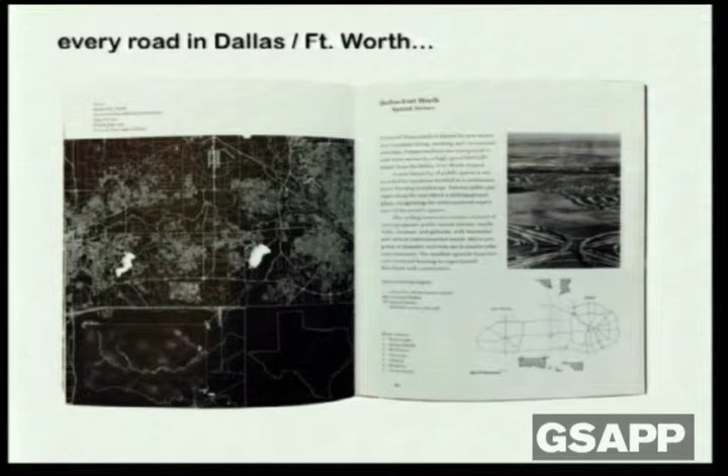So that was the time of Tschumi, just before I started. I worked as the lowest intern at Steven Holl's office, like really the lowest. I was responsible for inking almost every drawing in this book, Edge of a City, six days a week, not designing every drawing, just inking every drawing. And you don't ink anymore, but it was a fine art. Six days a week, all day, every day, I drew every road in Dallas-Fort Worth, and in Phoenix, and in Cleveland, and New York also.

And what's interesting about inking drawings is that it's copying. It's lots and lots of copying. It's kind of Zen, but it's sort of deep copying, and maybe internalizing. I'm hoping that I was also internalizing what I was drawing, because looking back, I realized that during my hours and hours of drawing, I'd become very interested in exactly what the book was about: architecture and the city.

The projects in Edge of a City leverage the organization of the city, program, and form to create new architectural form and new ways to live in those forms. Looking back, I realized that Steven was really interested in combating sprawl with these new forms.

And I'm currently working on my own book with my colleagues at UrbanLab, in which we also speculate on what is possible for architecture in the city. We do it with ideas of hybridizing and leveraging and thickening. And we're producing a set of projects that we hope question the assumptions and expand what's possible for the city.

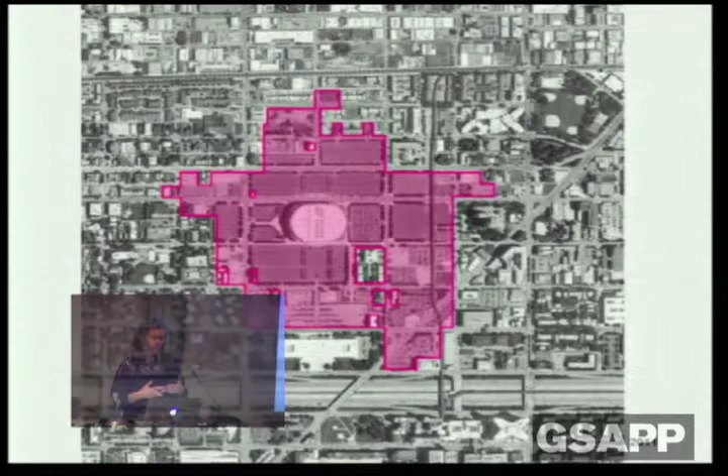So we asked ourselves, what could we do to stop the expansion of void while leaving the parking? And how could we also leverage that for new public amenity or public space within the city?

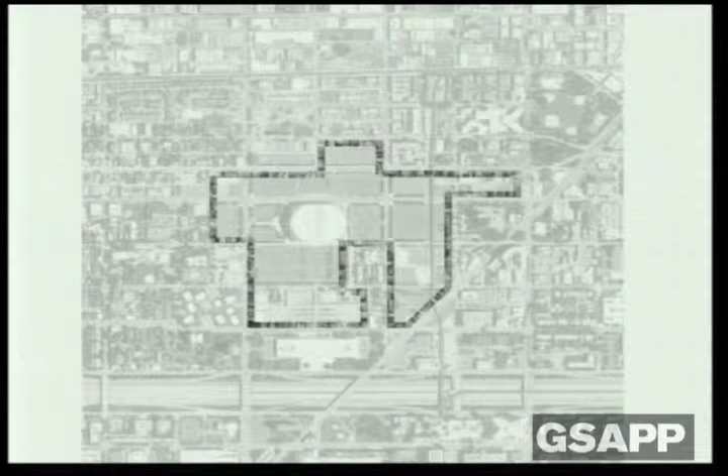So we came up with this idea of a reverse growth boundary, a kind of growth boundary for parking, but a new edge for the city to fill in too. We encircle the official parking, hoping that by doing this, the neighborhood will fill back in.

In order to inhabit the boundary, we looked at a typical Chicago typology, the 3-flat. We played with it, stacked it, carved it, and invented a catalog of new 3-flats that we could deploy along our growth boundary for different effects, programs, and densities around the zone.

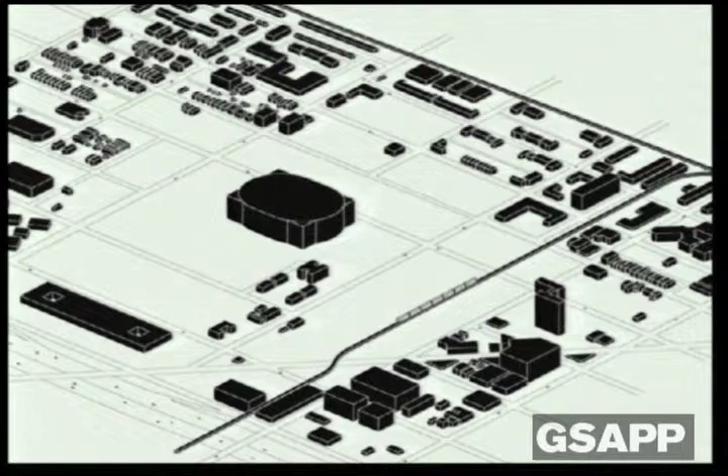So here's the existing condition with the site and a lot of void. There's the parking with our growth boundary delineating it, extruded, and then the 3-flats deployed.

The project's not really a wall now, but a series of gateways that allow passage through while still giving identity to the United Center precinct and still allowing for porosity. It's more of a sponge.

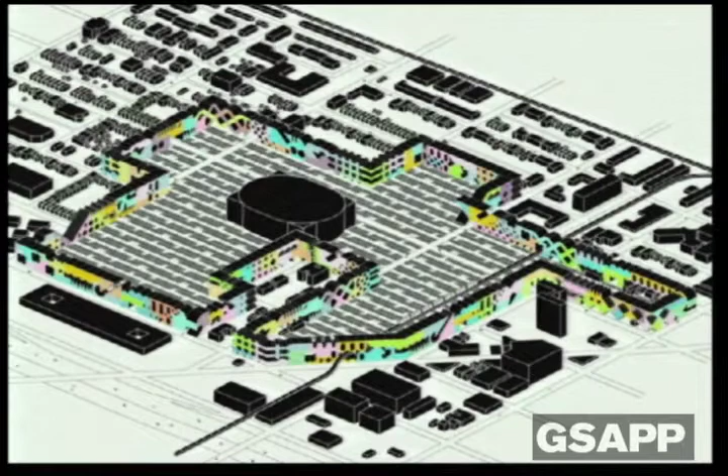The difference between this slide and this slide is the neighborhood we're imagining would fill in and densify organically. We wouldn't design that part.

Since the United Center is a winter sports stadium, and we've created this precinct, a very specific area, we thought, what can you do in the summer?

This growth boundary could actually be animated by temporary programs within the zone. For example, in the summer, it could be the city's largest temporary farm, or its largest campground, or its largest temporary pool.

So that's sort of how we very quickly approach our projects when we're speculating and asking 'what if,' and then playing out the scenario to its end to answer the 'then.'

So another question we asked ourselves—this is the project that Amal mentioned in the introduction, Growing Water. What if a city's streets were leveraged to create a new street park network? And then what if that network hosted a series of new building hybrids?

Growing Water starts with the grid of the city and the fact that Chicago sits on the shores of Lake Michigan, which holds 20% of the Earth's surface fresh water, and 95% of the United States' surface fresh water.

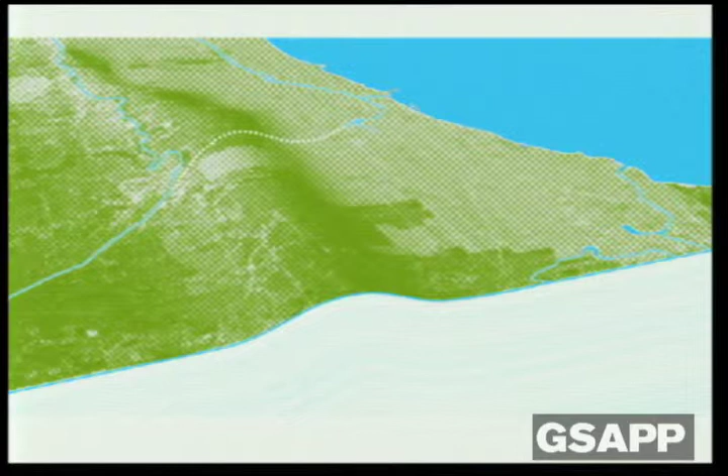But 100 years ago, Chicago decided to cut the watershed boundary, connect the two watersheds, and reverse the Chicago River.

The city did this because it was dumping its wastewater into the rivers, which were flowing into the lake, which is where it was getting its fresh water. So it seemed like a really good idea at the time to reverse the rivers and send Chicago's sewage to St. Louis.

So then St. Louis started to sue Chicago and hasn't stopped since.

This is the current water situation in Chicago on the left. It's an open loop, and those of you interested in ecological issues know that loops aren't supposed to be open usually—they're meant to be closed. So we thought about how we would actually close the water loop in Chicago, but leverage the infrastructure to do that for new public space.

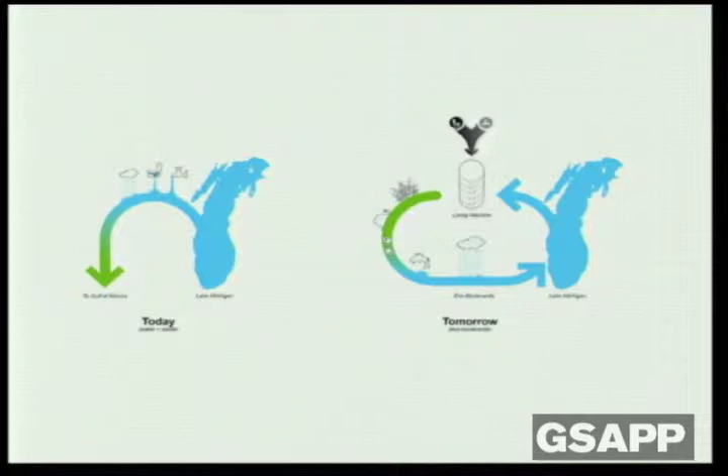We propose to redesign every street, every half mile from each other, to collect stormwater and wastewater and use gravity to allow that water to be percolated or drawn back to the lake.

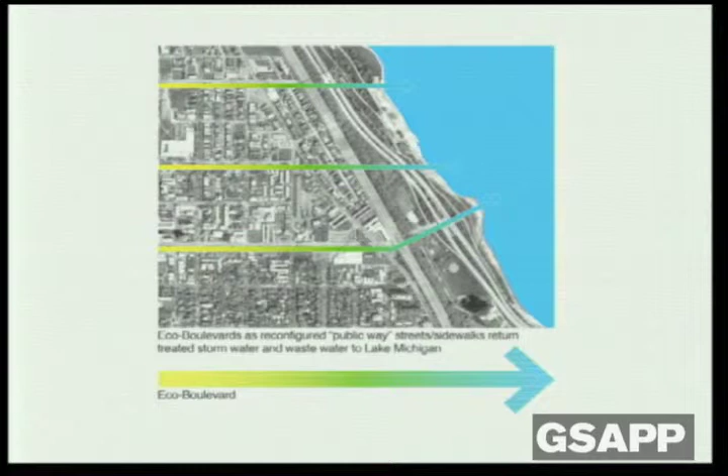The eco-boulevards, as we call them, would run through the city according to the network of the city, making connections with parks—there's a kind of emerald park system and a lakefront system—so it would basically turn a couple of existing networks and standalone parks into a huge park network, and every inhabitant would therefore only be a quarter mile from a park.

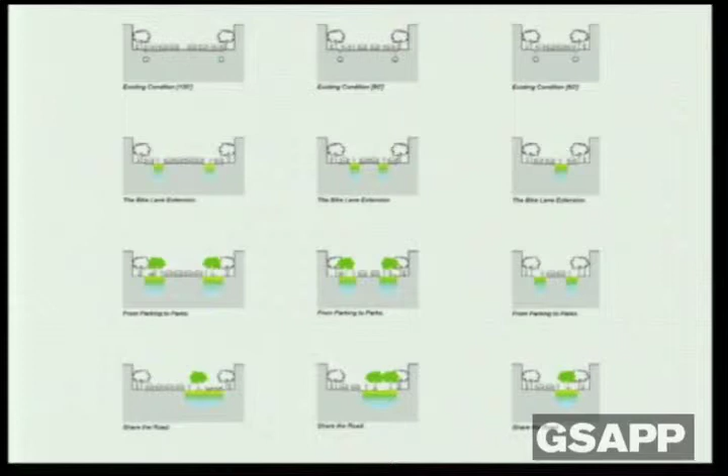The streets that were turned into eco-boulevards would be hybridized to accommodate ecological and cultural programs. These represent patches of ecological and cultural programs—the ecological programs collect stormwater, basically they're wetlands. The cultural programs are things like markets, playgrounds, and recreational fields. This would be a really souped up street where all the parking is gone and very little street is left, but this is only the most extreme example.

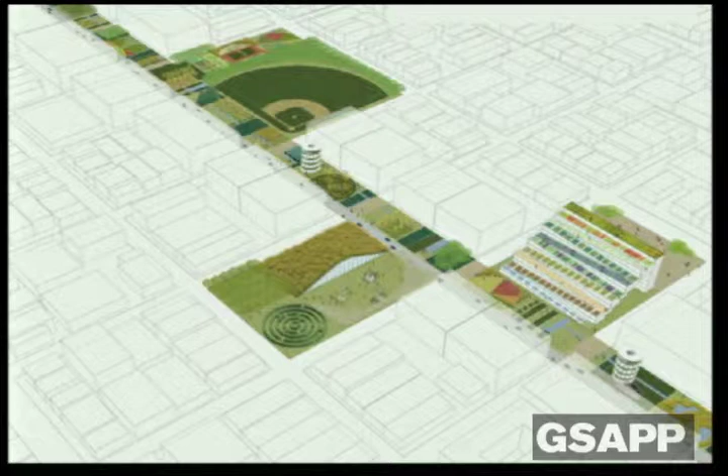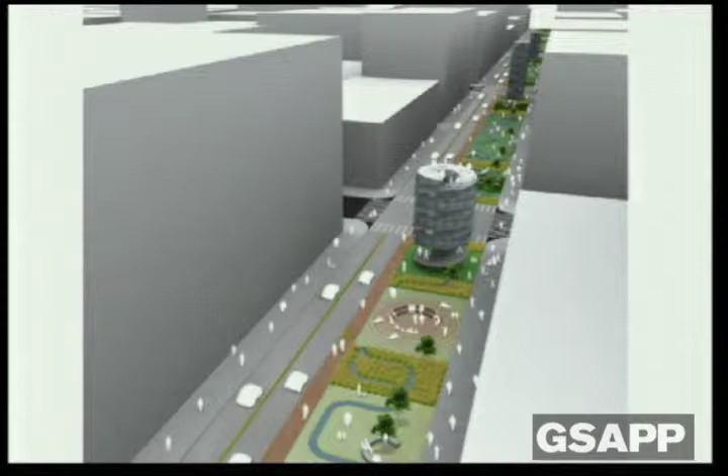You see that we would also hook into existing vacant spaces, of which there are many in Chicago, and existing park surfaces. And then perhaps in those areas where there was a little bit more space, architecture could emerge. The street-to-park ratio would depend on the location and density of the surrounding neighborhood—so if it was a super dense neighborhood, there would be less park space.

In order to do this, we also thought about how to clean the wastewater, because if you replumb Chicago, you have to do stormwater and wastewater. So we came up with a catalog of little ecosystem water treatment plants, which would be distributed throughout the city and clean wastewater passively, saving energy, because it costs a lot of energy and money to move water around the city. Currently it's moved to the largest water treatment plant in the United States, which is in the suburbs of Chicago—it takes a lot of energy to do that.

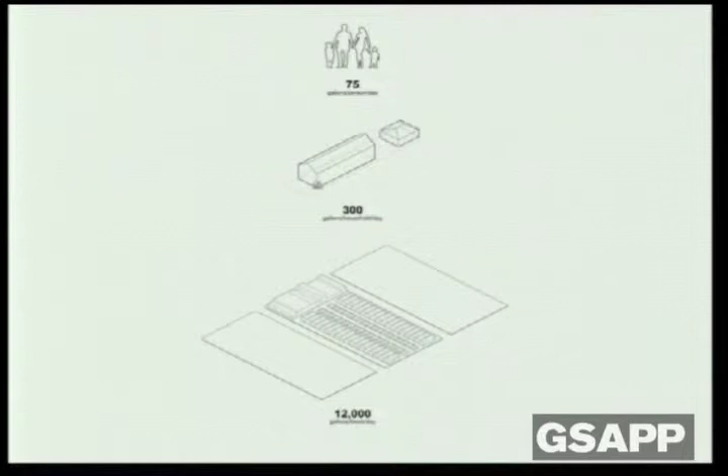But at the same time, these new neighborhood infrastructures could be double programmed to introduce socially oriented programming in the neighborhoods. We looked at how much wastewater is generated by individuals and groups and figured out that we would want to treat basically one or two blocks of typical Chicago density, which is less dense than Queens—it's not really that dense—and how many of these little plants we would need throughout the neighborhoods.

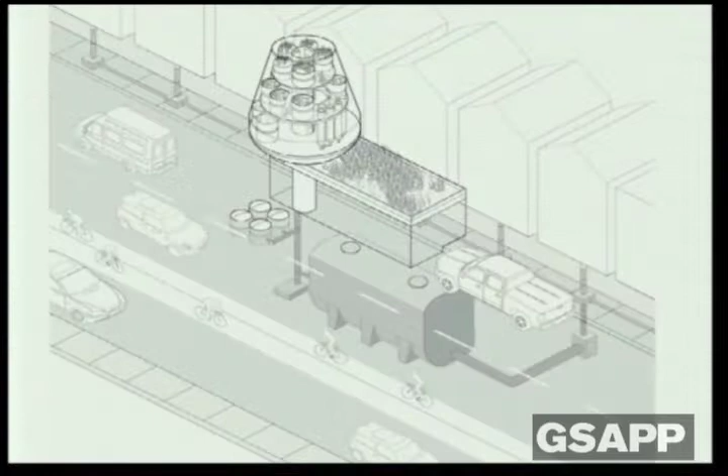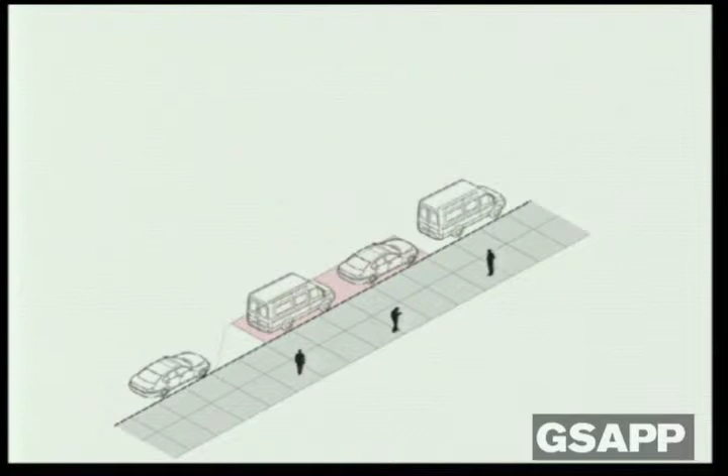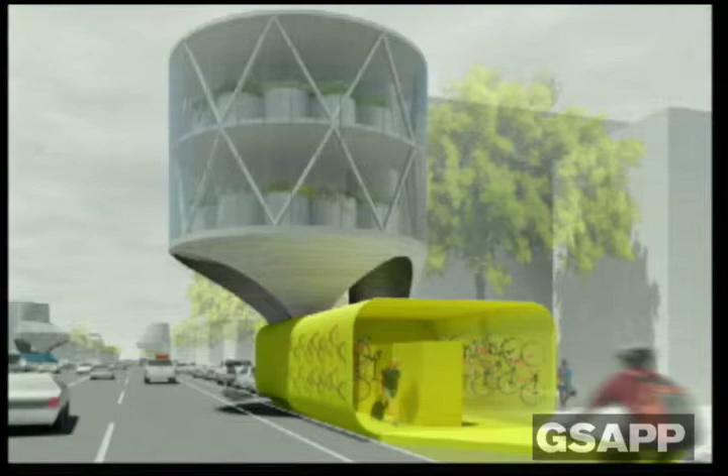For example, this one is a bus shelter with a bus lookout for when your bus just doesn't come, which happens a lot in Chicago. This is a bike station—we have our version of Citi Bike, it's called Divvy Bike, so this could be a city divvy. A food kiosk. A recycling center.

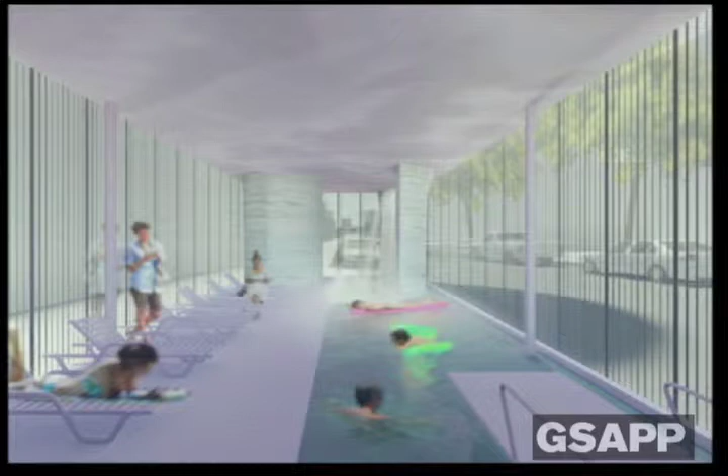And maybe most extravagantly, the water that's cleaned by the little eco plant can be leveraged to provide clean water for a neighborhood pool. And so in each moment of the project, we're really trying to think about how we can hybridize and leverage form, program, and infrastructure in order to create new possible lifestyles. So right now you can't go to the corner and go swimming in Chicago, but maybe you could, and maybe you should.

We started to think about, we got kind of obsessed by water, and we started to think about other ways to leverage infrastructure and hybridize it to solve issues like flooding, and could we create new public space from that in Chicago?

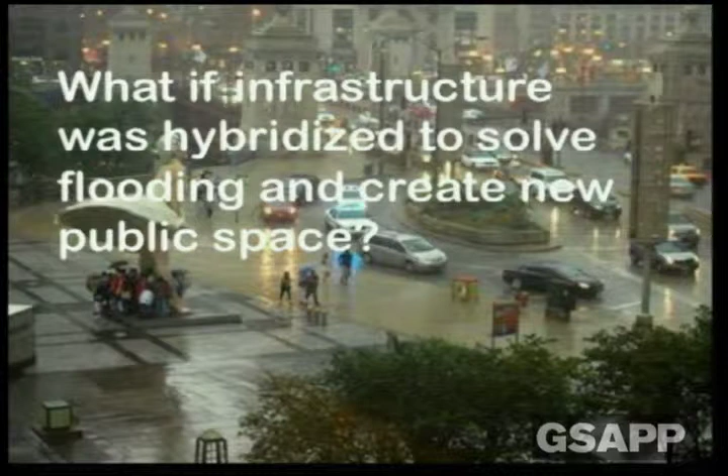We seem to have 100-year rainstorms really frequently, more frequently than every 100 years in Chicago. And even a typical rainstorm, not a 100-year rain, causes flooding in many cases in Chicago. This is, again, because of the infrastructural moves that were done 100 years ago, when we connected the two watersheds and reversed the Chicago rivers.

All stormwater overflow goes into the rivers, and when it has nowhere else to go, it needs to go into these giant holding tanks that the city is building. This one's being built in the suburbs, and it is impressive, but it's monofunctional and therefore completely uninteresting for us.

So we propose that perhaps a different tact would be interesting, that we could unreverse the Chicago River, use it to catch stormwater and hold it, and then filter it through these filter islands that we are proposing that would also separate the two watersheds again.

If we dam the rivers, separate the watersheds, and use these new pieces of large-scale ecological/cultural program to clean water and also make new social space. So it's a hybrid of landscape, a landscape of water cleaning and new public space, and it happens at the lakefront in this case.

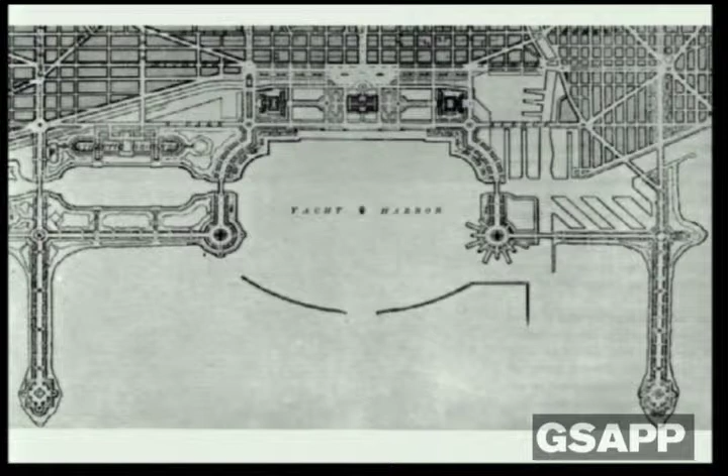Our project riffs on his formal logic, as you can see. Water is cleaned through a series of landscapes. It's most dirty at the north and most clean at the south. And at the south, it finally runs out into the lake.

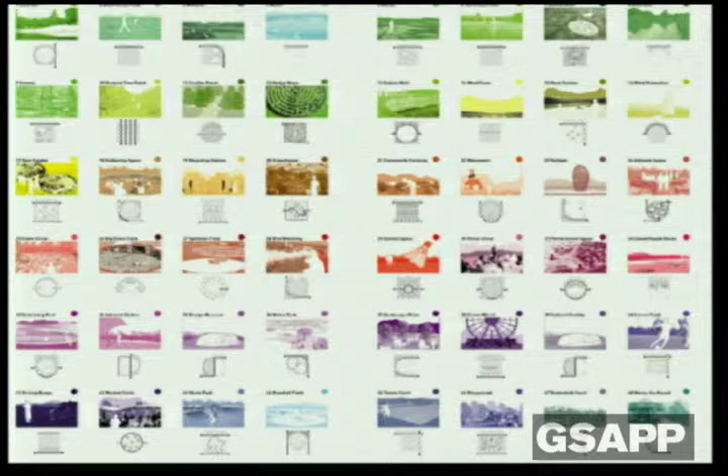We devised a series of patches, we call them, a spectrum of ecologically based, the greens and the teals, to more socially based, which are the pinks and the purples, which also have embedded in them architectural form and surface.

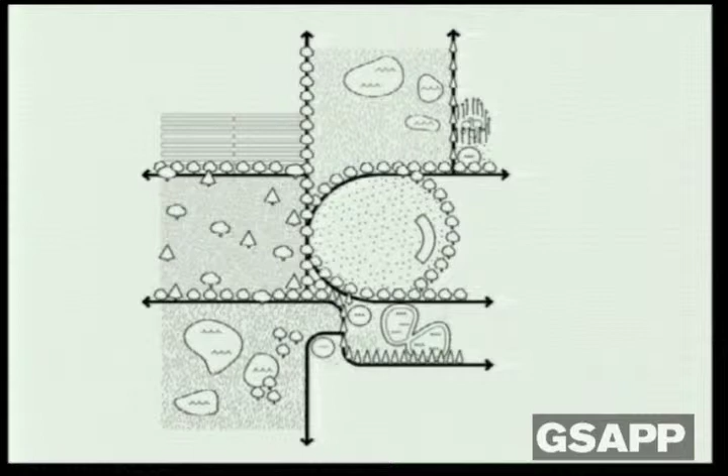And we arranged them from where we need most cleaning, there would be more ecological patches, and where we need less cleaning, more cultural patches, so those are mostly on the south. This is a zoom of several patches coming together. Pathways meander between.

Zooming out to the whole, you can see Ferris wheels and play fields and playgrounds and sandboxes and amphitheaters, as well as different types of wetlands.

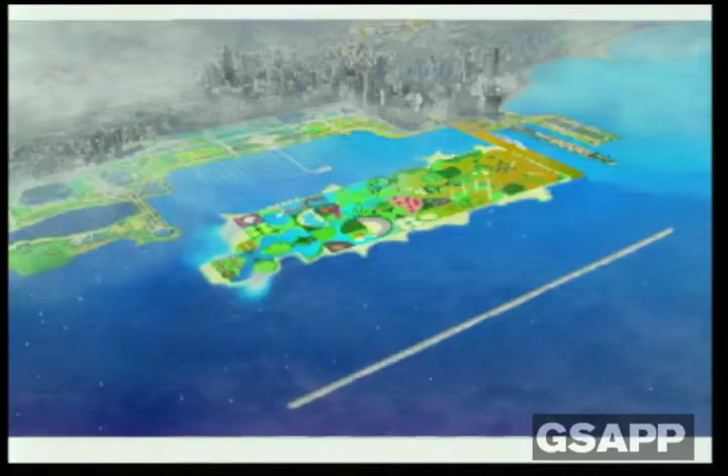So the island during a rainstorm, you see the stormwater being processed through the landscape. It's more dirty at the north and more clean at the south. And then after the rain, this is how it is in its non-rain event version. So it changes.

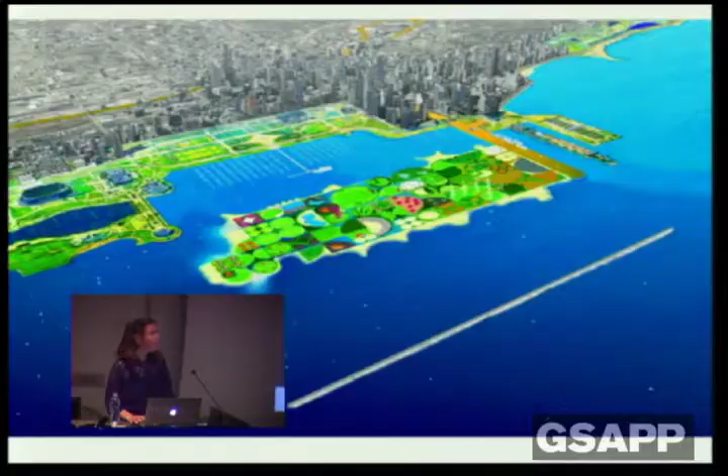After presenting projects to the city and the mayor a couple of times, we realized that there's one magic word for them, and that's jobs. So we started thinking, could architecture actually engage in this discussion, can architecture somehow be a catalyst for economic growth? And so we started thinking about, what if infrastructure was hybridized with manufacturing program to create public space?

We called this project Free Water District. The idea begins at the same place as the Growing Water Project, with the fact that the Great Lakes have a lot of water, and that soon, or maybe even now, that water is more valuable than oil, and oil is responsible for millions of jobs. Water could be as well.

If the Great Lakes is the Saudi Arabia of water, then we should be able to leverage that natural resource for new possibilities for the region. In the last decade, the Great Lakes region, the Rust Belt, has lost at least 2 million jobs.

So this project thinks about creating a free water district, free for certain types of programs. They're like tax-free zones, they're free water zones. There's precedent in other economies.

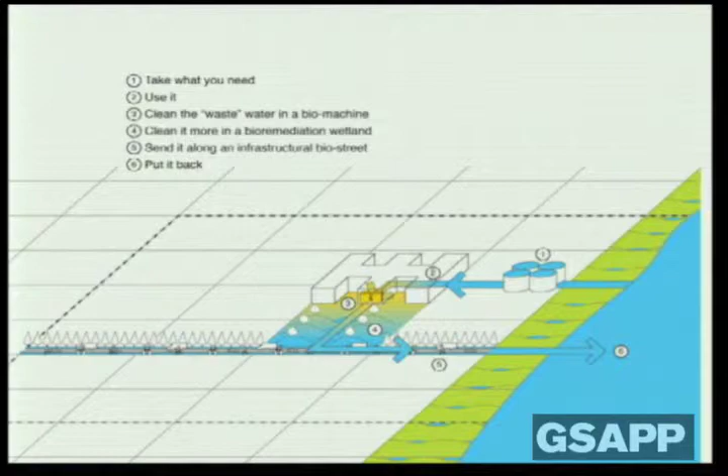Remediate it further in wetlands, send it back in a bio street, which is basically an eco boulevard, and put it back into the lake. At the same time, take responsibility for cleaning the post-industrial landscape that dots the whole Great Lakes region. This is a typical condition. There are so many post-industrial wastelands in this region, and we can't make a park in every single one at a certain point. Other things need to happen.

And so what you see here is neighborhoods of people who are looking for jobs, railroads, highways, canals, factories that are still surviving, one of the lakes, and the edge of the lake.

The free water district would be organized into this situation. It would start with a kind of a bio street, or series of bio streets, which would be the main conduits for taking water out and putting water back into the lake.

The middle zone would be a landscape and architectural intervention that would do, amongst other things, flood control. Flood control would be part of the system because we would want to try to be completely offline from the neighboring city's infrastructure, so we would not have a combined sewer and rain and stormwater system.

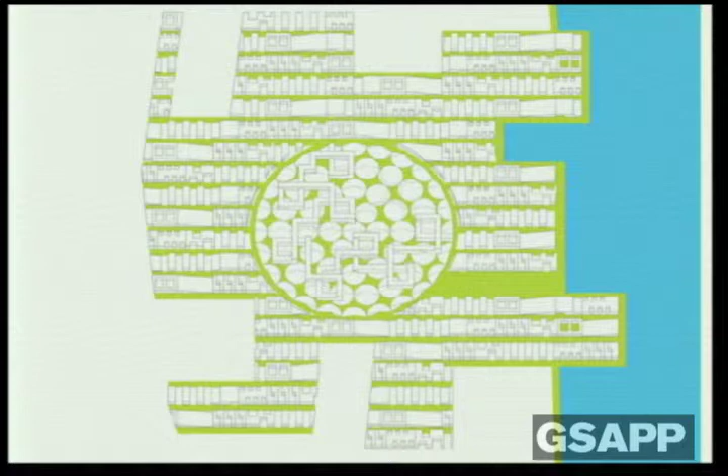This is that center zone in a flood. The factories and corporations would aggregate around, and then each free water district would be somewhat a result of its situation. So it looks like this little running robot guy here, but it might look different somewhere else. We would always try to make it kind of look like a little running robot guy.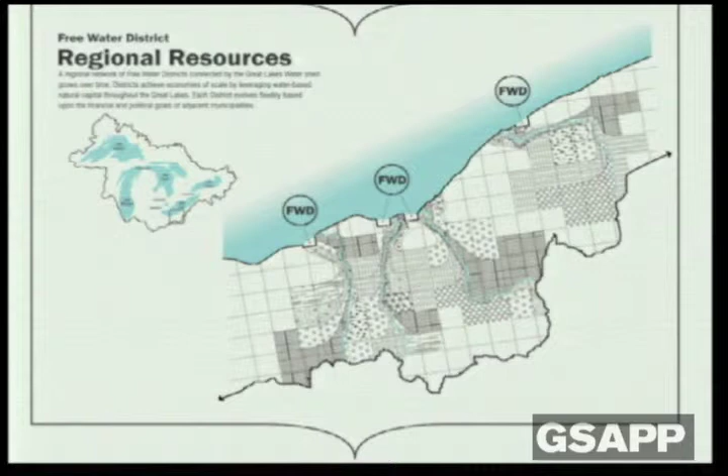We would imagine that these free water districts would eventually have impact inland and into the hinterlands of the Great Lakes region. As resources flow back and forth, it would affect the hinterland.

And this, then, we're really always trying to think about what are the new architectural forms and what are the program mixes that might be possible when we set this whole what-if up, and what lifestyles might be produced from this mixing. So we look really into the sections and try really to think about what would be possible.

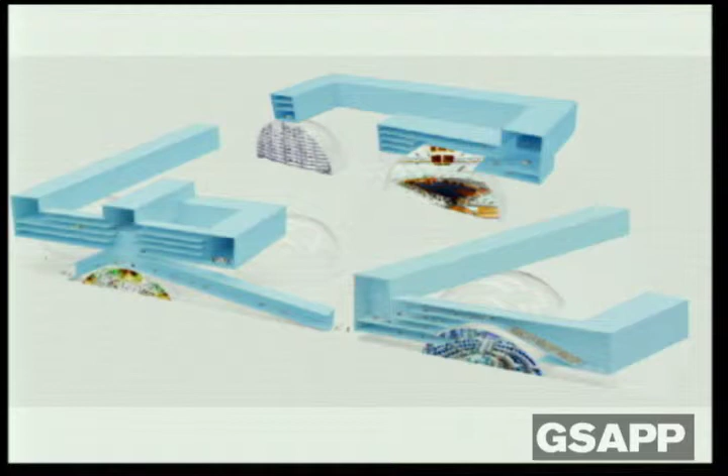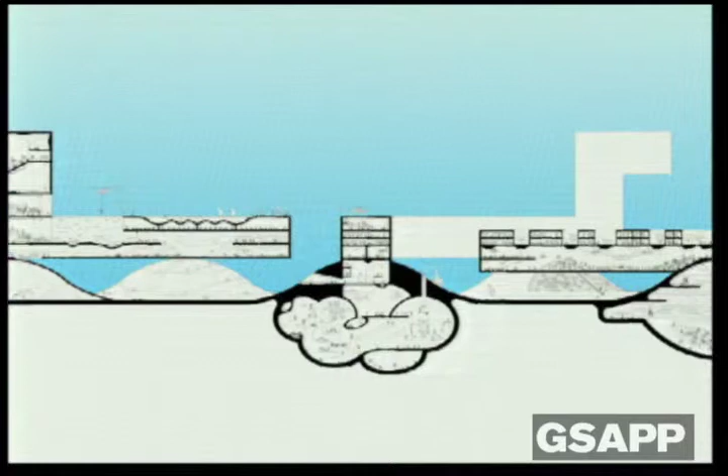So the factory is on the left, and then there's a bio street. There's the recycling coming up next. Above is the R&D university. On the surface is park program and recreation. Underneath is other factories and car washes and a giant library.

Above is a farm, and here's an auditorium. A club or a disco connects to the university student center above, and then a very loud stadium, which somehow makes sense with academic offices above. A drive-in movie theater, more recycling at the edge, which connects to the factories, and another bio street, and then the neighborhood beyond.

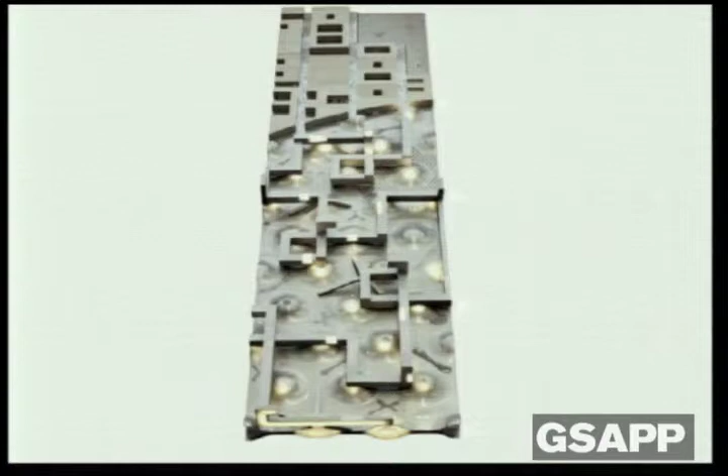We were invited to present the project at the 2012 Venice Biennale, so we made a giant model in which we looked very specifically at the formal and programmatic possibilities of the project further.

This is cutting through a section of the R&D university with a stadium on the left and a disco on the right, and the way you get up into the university. The university could have dorms potentially, although mostly there's no living in the zone.

These are just more images of the model.

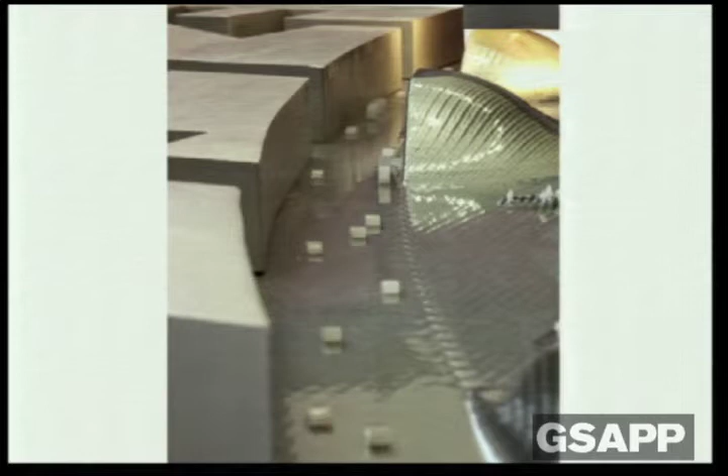Here's the road that rings the center zone, the factories to the left, and the recycling half mound to the right.

Looking at what does it feel like to be in the landscape and near the landscape.

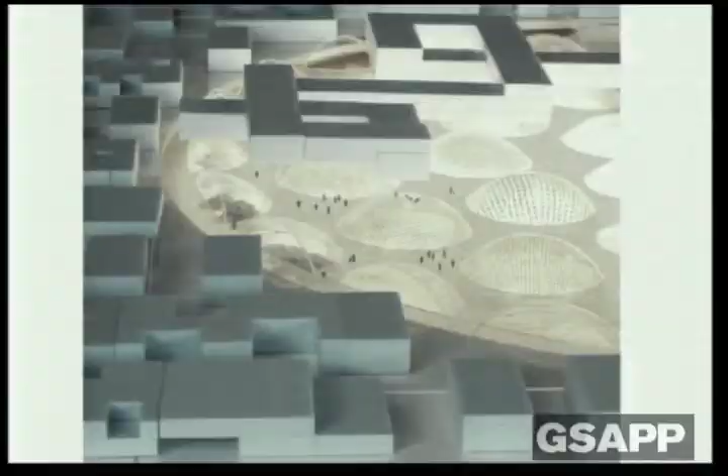And then Mayor Daley retired. So we started looking somewhere else. We started looking to the southwest.

We got tired of so much water being plentiful, and we thought we should look at places where there's no water, but the weather's really awesome. So we started thinking about the possibilities of these cities and these landscapes. We started to think about what would happen if you built a new aqueduct in the desert and created new LA and Vegas lifestyles in the desert. Everybody wants to live there, but there's really no water. And we thought about Death Valley.

Death Valley is one of a number of natural depressions, sinks, and valleys that exist in the world. And these are all lower than sea level. It had water in it many years ago.

Our project is a little bit outrageous, maybe really outrageous, but it's just a thought experiment. We propose to flood Death Valley. And the reason we're doing that is because, if you read the newspapers, the Southwest is more and more desirable to live in, but there's less and less water. Aquifers are being tapped. Desalination is the next step.

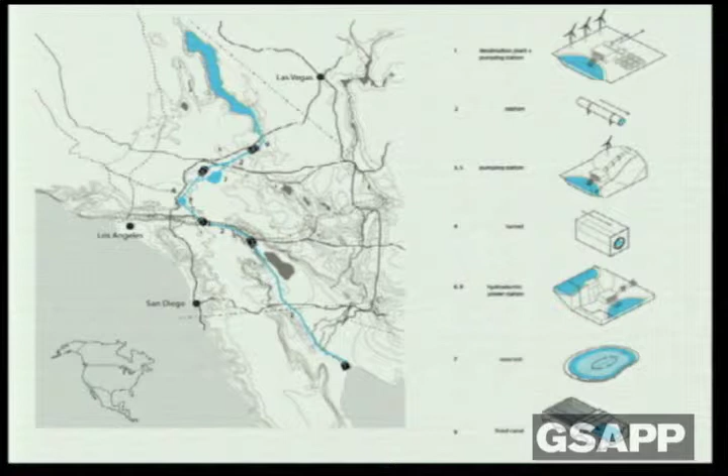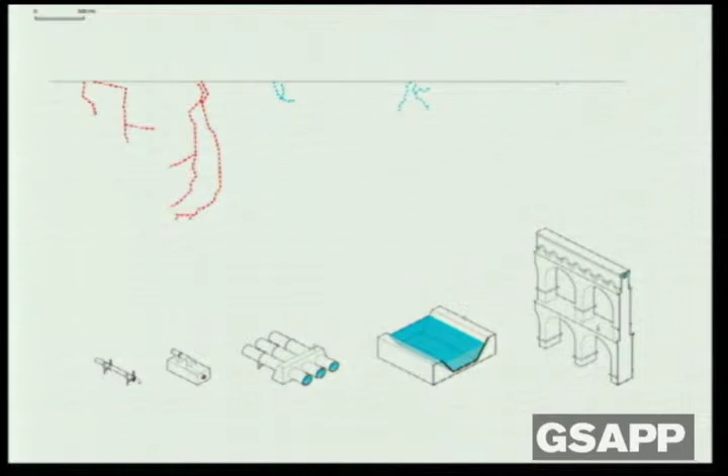However, it would be maybe different than every other aqueduct being constructed right now, because it would leverage the aqueduct to create new architectural form and many new possible lifestyles along it. In its most basic form, it is an aqueduct that crosses the landscape without interrupting the landscape too much.

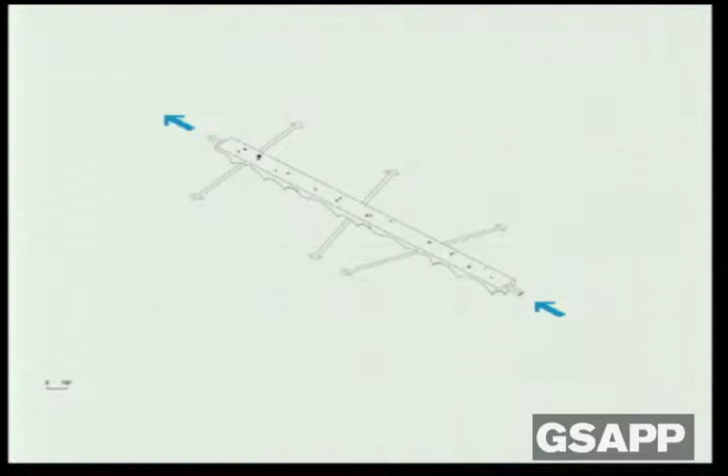Plant and animal species can pass by and through it, and it can also pass over man-made infrastructures and settlements. This is what it would look like underneath in its typical condition. But then this is what it might look like on top, and the beginnings of new desert lifestyles, which we could imagine.

We looked at a variety of scales. We looked at a kind of city density, and it's sort of not really a city, but a city in a building. So in my studio, we're doing a lot of thinking about wall buildings, mound buildings, and mat buildings, and we have one of each here.

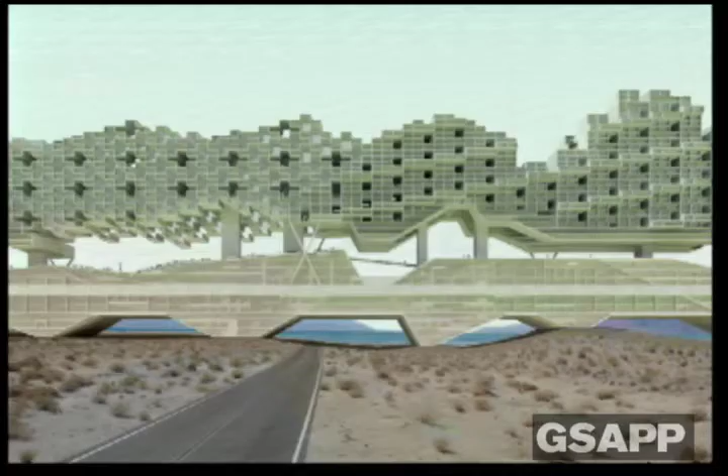This is the wall building. It's a vertical aggregation of program and form, and in the middle, a kind of new social space that we don't think exists right now in the cities around, which is a kind of shaded social space.

This is kind of a drawing of it. It changes sectionally as you cut through it. The organization is residential above and certain cultural programs above, and then below, commercial and aqueduct.

The aggregations change because the types of elements that are kind of collaged together are changing. So we looked at a variety of housing types and commercial types that we would then aggregate together along the aqueduct to see what was possible.

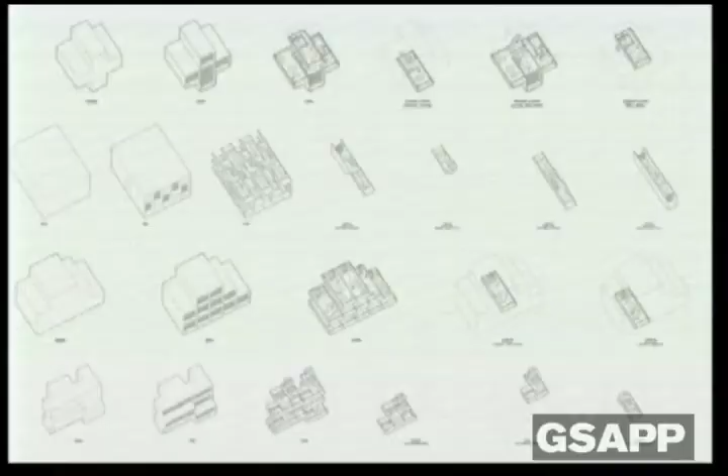We also thought a lot about the kind of space in between and how we could modulate the form above and below in order to get difference within it. We're very influenced by megastructure projects from the 50s and 60s, but we're trying to go a slightly different way and introduce difference, figure and form, and site specificity into that sort of thinking.

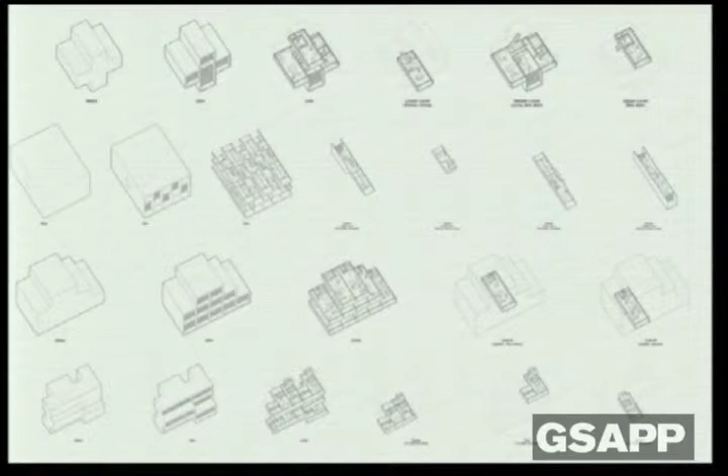So we developed a number of housing types that aggregate together to make difference along the project, and different types of lifestyles would be possible within them. There's rental, there's hotel, there's condo, there's assisted living. So there's the typical residential floor above and the commercial, social, public space below.

Because of the nature of the climate, different strategies of sun shading and facade would be necessary. So that's the south facade. This is the north facade.

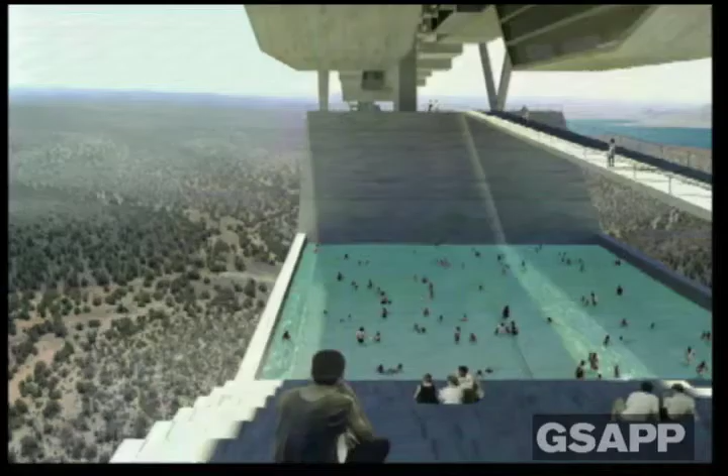And then what we're most interested in is the public space in between. So here's a pool, playing fields, hanging out spaces, and then the sort of aggregation as it's moving through, as it's not moving, as it's there, it doesn't move.

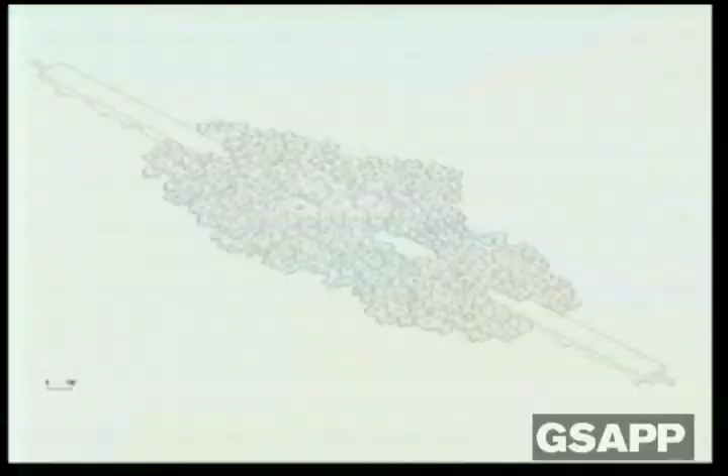We also looked at a town density. And here we thought, what types of public space could we invent by playing a kind of zoning game? Here it's a kind of mound or mountain building, an aggregation that appears mountain-like. And what we thought here was that we would propose to build lot line to lot line. So we're not inventing really new political structures, but just slight zoning tweaks.

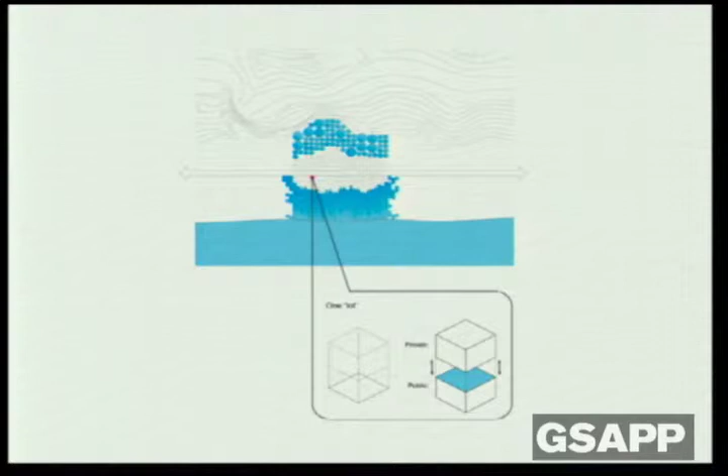Because it's the desert, you would get your light and air from courtyards, which could help shade your space. We're really interested in this kind of contiguous or continuous public space.

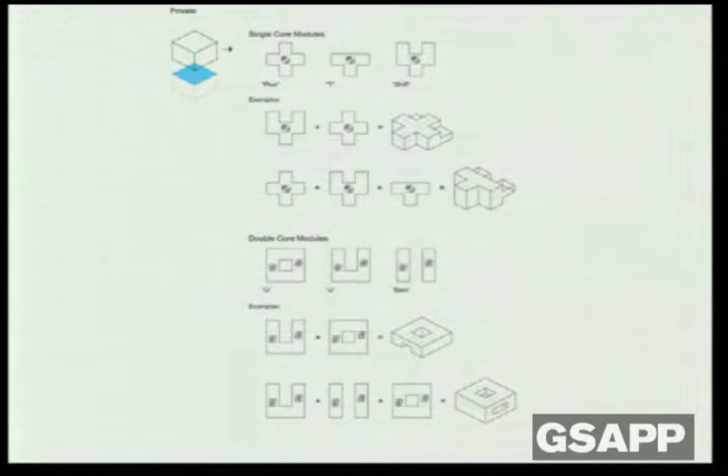The idea would be that as a lot owner, you would build to connect to whoever was next to their public space. So public space would become a continuous but differentiated surface above different types of residential ways to live, all courtyard based. When you mix those together, you might get this catalog of potentials where the blue is the public space, below is commercial, and above is residential.

And it somewhat starts to aggregate like this. So it might grow like this. It doesn't have to all get built at the same time.

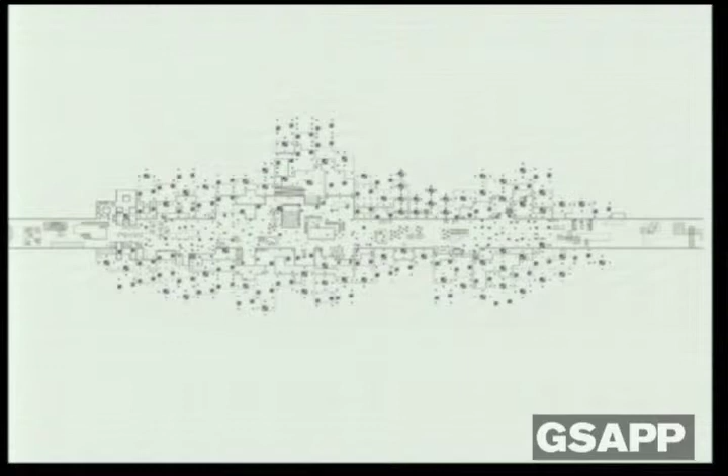We thought about the quality of the mound, and then mostly also about this idea of the public space within it. This is a typical plan cut at the level of the aqueduct public space, but then this is a plan of all the public space. So it's a plan that kind of goes like that. And a zoom of it.

And then the kinds of spaces that might emerge from that. Since it's in the desert, we're particularly concerned with making different light modulations so that different types of programs would be comfortable without the use of too much air conditioning in the space.

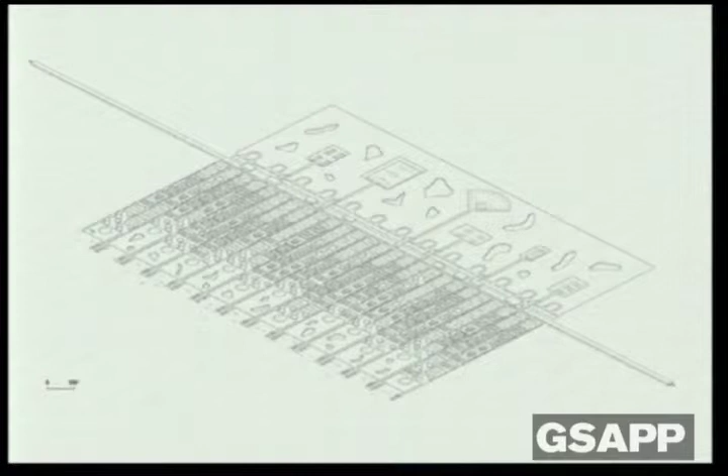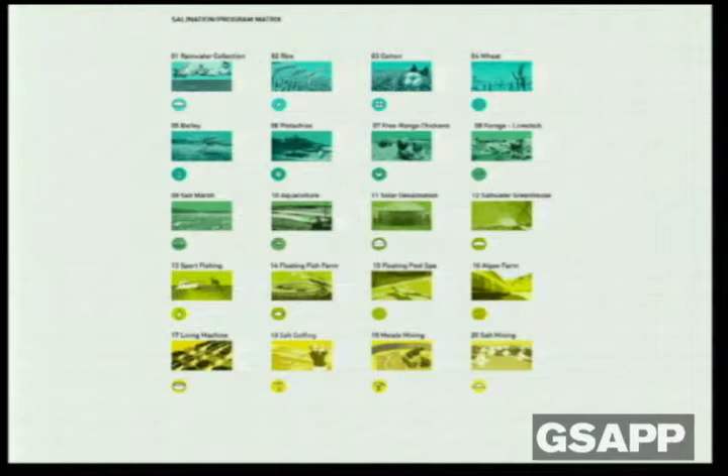We also looked at a suburban density. We thought about what happens when you aggregate housing program with aquaculture and agriculture, and looked at programs, researching agriculture and aquaculture that can work with a spectrum of brackish to clean water.

These are the aquacultures that we looked at, and then we sort of mashed them together with different types of mat buildings that could provide shade for the aquaculture, and at the same time provide different types of living and working conditions for that upper level.

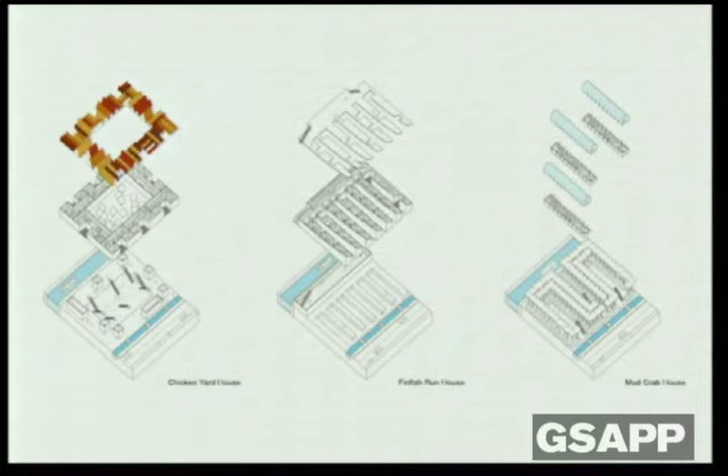So if you live in the mud crab house, it's different than living in the chicken yard house, which is different than living in the orchard house or the goat house. These all kind of tune in order to provide a certain amount of shade or functionality for the aquaculture program. And then aggregated together, it becomes a kind of very large mat building, or the feeling of one. The lower level on the left and the upper level on the right.

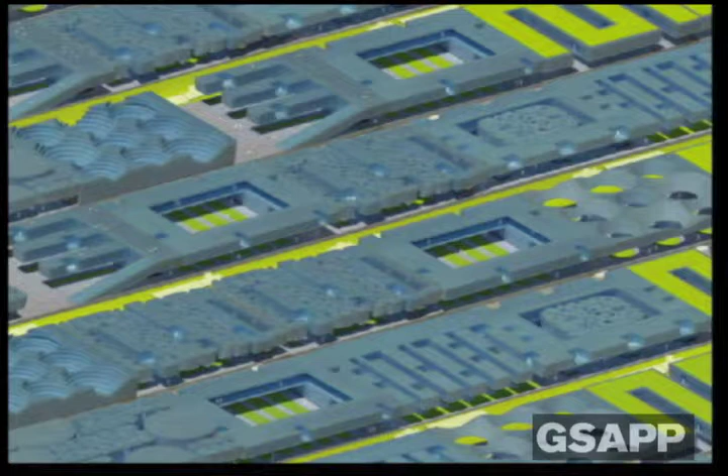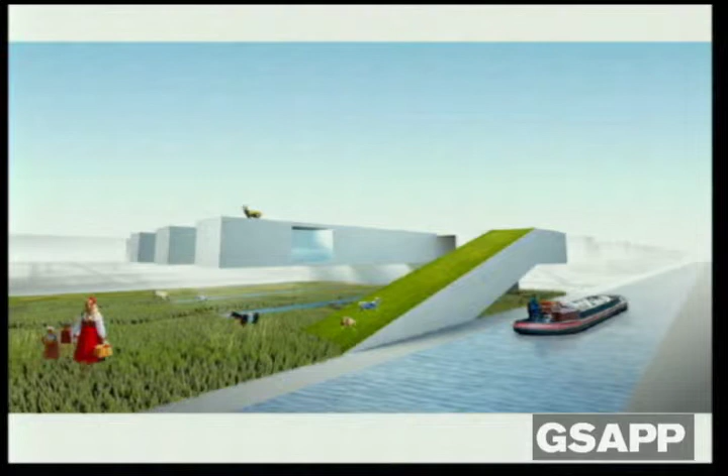And then this is the site plan, and a model of the different houses. This is the shrimp pen house and the goat house, and you get some Swedish people too.

And then finally, on top of the aqueduct, a herd of goats, and how it might look from above. So those are all ideas of, we think, new possible lifestyles.

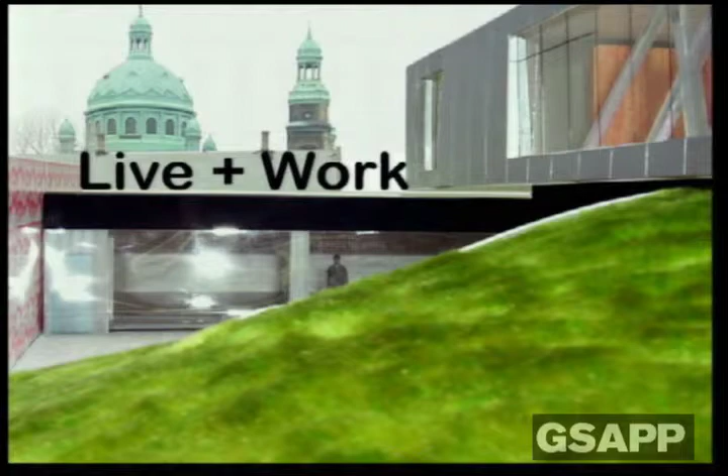But at the same time as we're generating those, we're also thinking about and doing and making at a much smaller scale. This is a project that we call Live Plus Work. It's our own studio and house. We built it when we didn't have any clients, as a demonstration project that we could build.

The site was, on the site was an existing grocery store that was condemned by the city. And we looked at recycling it, rescuing it, but it was too far gone. So we demolished it and recycled the demo into a hill, which is the second tallest hill in our neighborhood. And we rebuilt the FAR, but we reorganized it.

Since the property is on a street that's commercially zoned, there's a rule that you can't live on the ground floor, but there's no rule that you can't build your landscape up to your second floor. There's no rules about landscape in Chicago because it's very flat, and they don't know how to do hills, so we built a hill. And that really transformed how we live and work in the space.

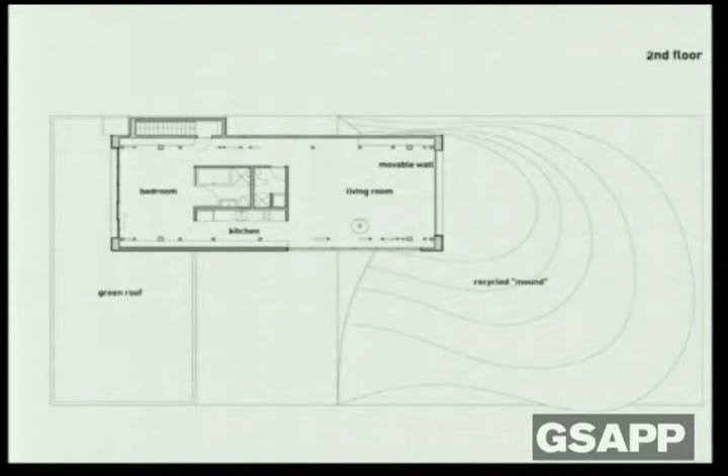So all of a sudden we have these new exterior spaces which are sort of defined by the mound and the work zone, and how we live in the apartment, which has a direct connection to the landscape. The spaces are really simply organized, but we hope that the result is somewhat complex.

And then the rest of the space is aluminum facades, either flat or corrugated, and glass. The mound is a kind of work in progress.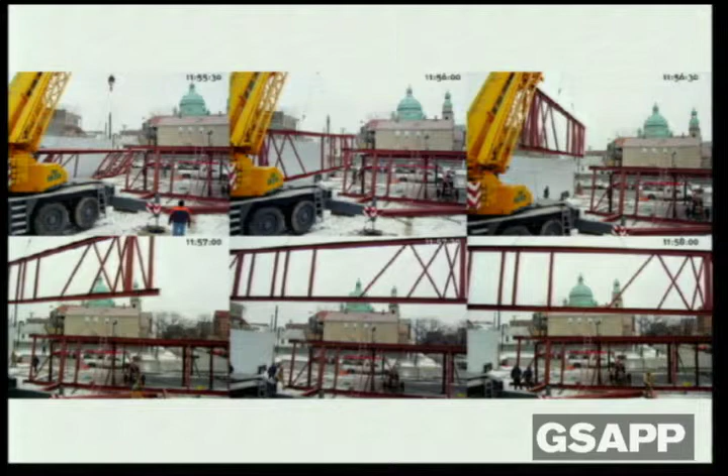The second floor is effectively a bridge, so it spans 2 columns in the front, 2 columns in the back. And so we get these trusses that span from the 2 columns on one side to the 2 columns in another. And we designed the trusses to respond to the interior program adjacent, so they don't actually exist in the exterior wall, they exist sort of 2 feet in.

And so we propose straight members where you might need more access, and diagonal members where you don't. So for example, in front, diagonal members in front of a window and straight in front of the kitchen or a closet.

And that's what it kind of looks like, we have a garage door in the living room. Just because we pretend that we live in LA when it's nice.

Here's a bookshelf. And this actually recently won an AIA honor award, so we're happy about that.

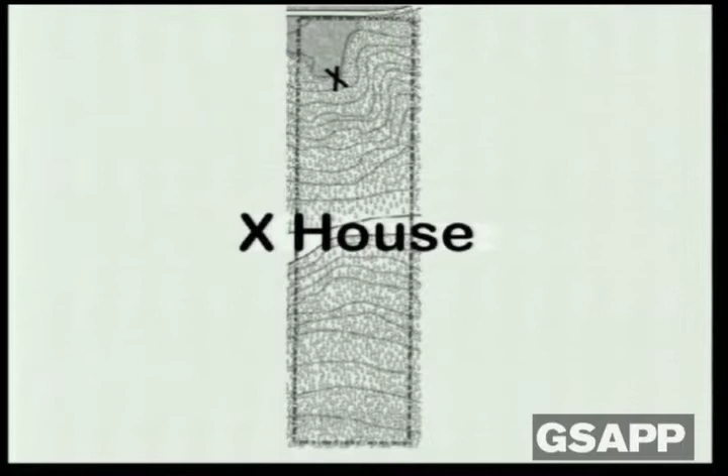After we built that, we built the X house, which is interesting for us because it is on the edge of 2 landscapes, a woodlands landscape and a prairie landscape. And we were being a little bit literal, and we thought we really want to build at the intersection of these 2 ecologies, and we had a very limited budget.

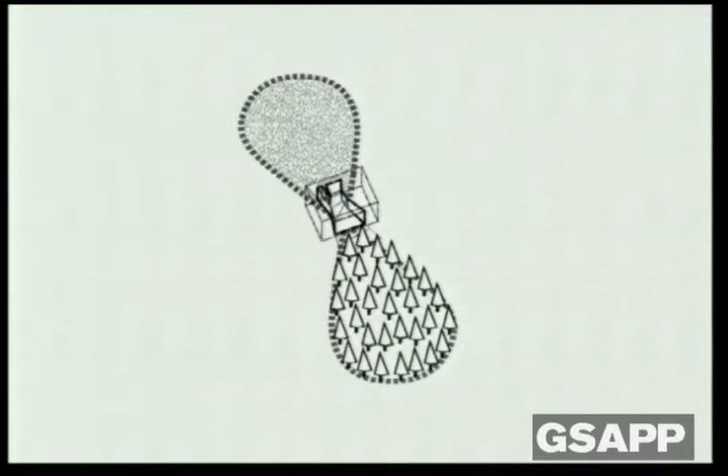So we built a very simple volume and carved the center in order to take advantage of the 2 landscapes and kind of connect through the building the 2 landscapes.

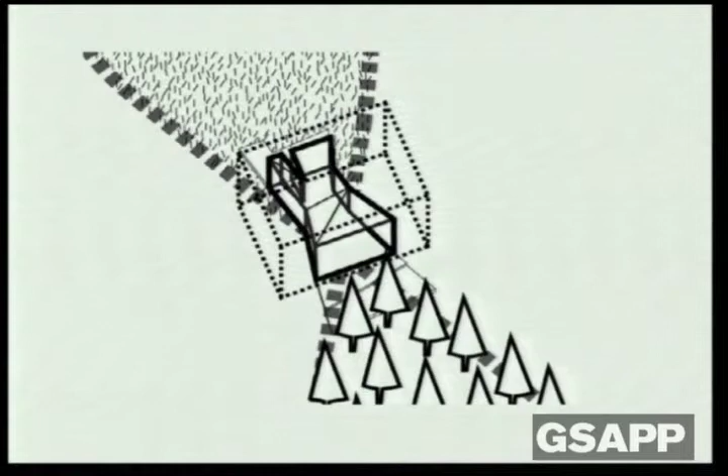In a funny way, we always called this the public space of the project, and the 2 sides, the dark spaces, the private areas of the project. So the 2 side pieces are on the left, 2 bedrooms and a bathroom. On the right, master bedroom and bath and kitchen and mudroom.

And those have different sort of requirements for public and extroversion. They're more introverted and more private, so we deal with them differently, which allows us this kind of feeling of a carved space. This is a section through the living room, and this is a little diagram that we made.

To figure it out, this is it unfolded, and this is it built. So you see right through the project, we're standing in the woodlands area, looking at the prairie side. And the space on the right you see through the perforated and corrugated aluminum is the master bedroom.

You see this is sort of right at the edge of the prairie and woodlands, and how it is to kind of live in that space.

We were really interested in taking the diagram really seriously and hiding the side private spaces with secret sliding doors in the main space, between the main space and in this case, the master.

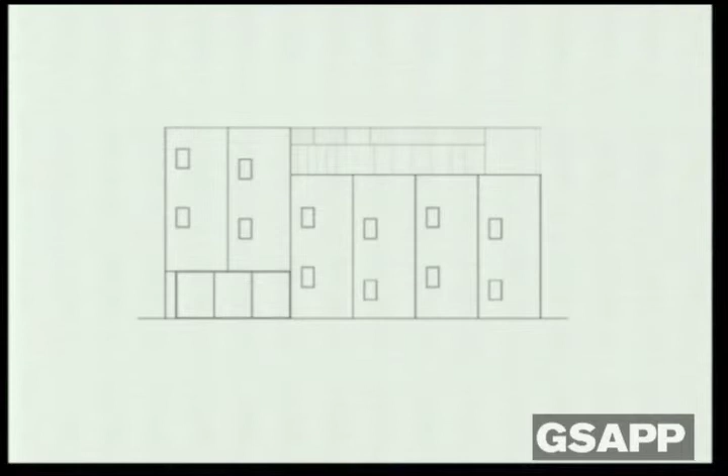So by raising up, we allow a space for the public cafe on the ground floor and a nice apartment for the owners on the upper level. So this is the cafe that slips into that space below.

Sort of as you're in one space, you might be sort of focused on another, a different view than if you're in an adjacent space. The deck, the living room. How do you live kind of next to that really big wall of sort of punched openings?

So those are the two spaces that we leverage out of that really dumb move. But then the interiors of the rest of the project are really different from that. They're more inward looking—they have secrets of how to make gluten into meat replacement, so can't give those away. This is one of the offices, and this is in the main manufacturing part.

So it is modest, but just the shift, I think, maybe makes it somewhat interesting, and it also becomes a kind of background for other things to happen.

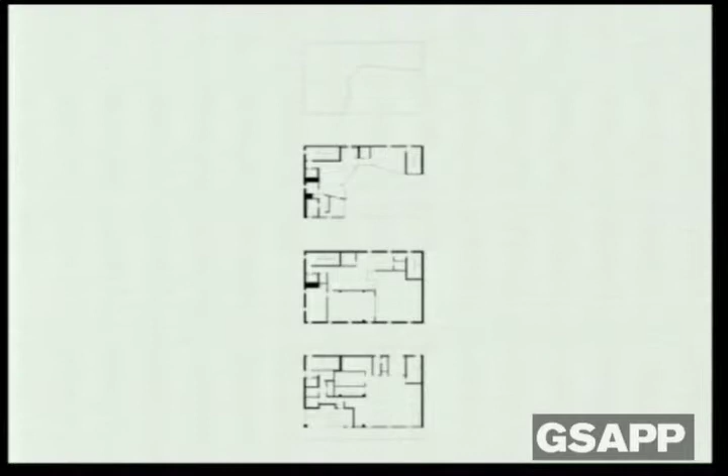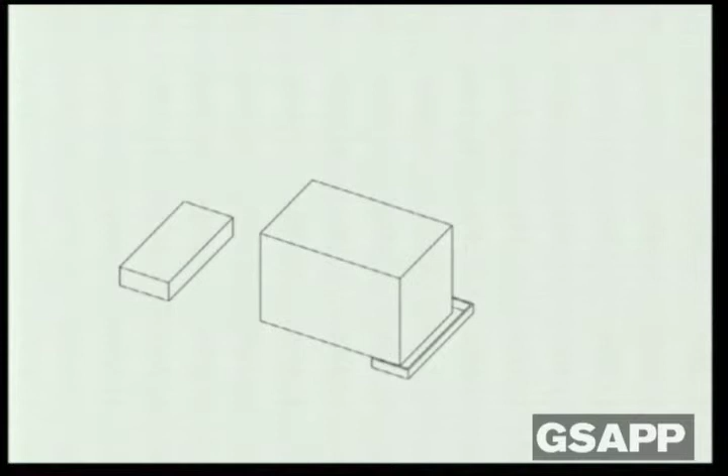The black and white house, which is 8,000 square feet, not including the garage and deck. So it's enormous on a 50 by 125 foot lot. And so we immediately thought about ways to modulate or reduce the building's monumentality, and so we performed a series of subtractions in order to do so.

We cut out a courtyard on the third floor. We cut off the back of the building. We punched openings, but then we also made one addition, and that is to add a kind of hill that would connect and make a continuous landscape from the basement up to the top of the garage. So then we get this.

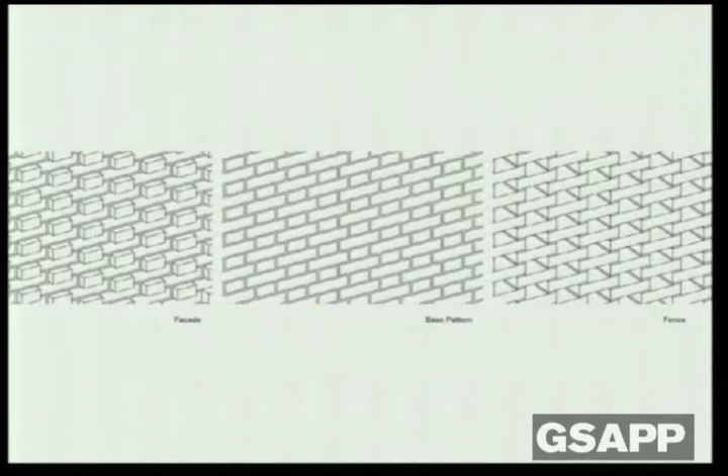We also looked at the scale of the actual material of the building, which is brick, and attempted to play with removing brick or protruding brick in order to modify the severity of the building. It's still monumental, but we're hoping it's more fun than it would have been if we hadn't done all of that to it.

The effect of the protruding and the missing brick is interesting. And we also fade the brick, so it goes from protruding to flat as you turn the corner.

In the back, the window, the sliding doors slide completely out of the way in order to, again, try to demonumentalize the building. And the reason we were hired, actually, is because we've become little mound or hill experts, and they saw our hill and wanted one for their kids.

So we have this landscape that goes from the garage roof all the way to the basement, which changes from grass and concrete steps to flat, to sod and up, and then they've just planted bulbs in it as well, and then to a playing field on the top.

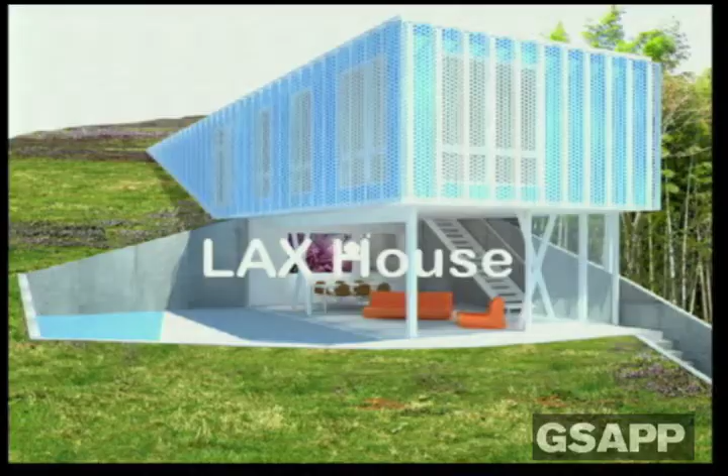It's located in Echo Park, and it has two really important views. One is the Angeles National Forest, which is really, really beautiful. The other is the Hollywood sign, which is either super cheesy or not, depending on your opinion of LA. I really love LA, so I always, when we were designing the project, kept checking that we would actually get to see it. I can report that it's mostly visible, although there is a tree on another hill a little distance away that I might have to trim in the middle of the night.

So the concept or diagram for the project is that the site is very steep, and according to the neighbors, they thought it was unbuildable. The land had changed hands over 20 years, with multiple projects proposed and none built. And meanwhile, the LA hillside ordinance is getting more and more strict.

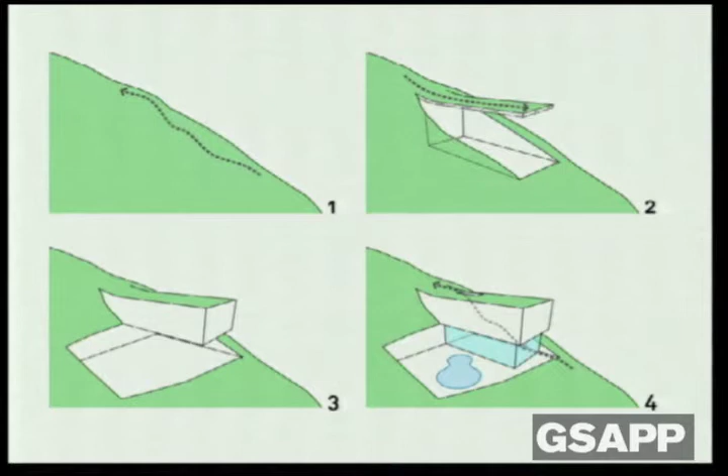And this is the rendering of the project. The facade on the second level is operable. The construction is mostly complete.

So what we're working on now is completing the prototyping for the facade. We have one facade prototype complete, and we're working on the next one, as well as the gate for down below. This is the second one. We also copy ourselves.

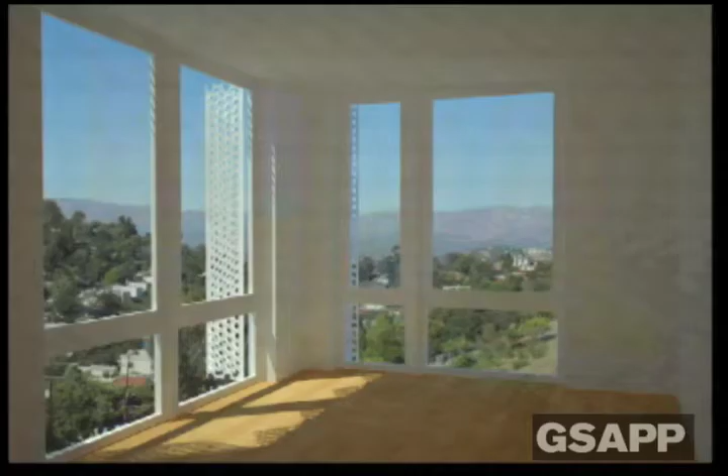We did this bathroom almost identically in Chicago, and now we're doing it again in LA. This is the existing master bedroom, and this is a rendering of when the skin is open and when it will be closed, which will add a layer of privacy and sun shading while still allowing for view. These are some drawings we made to figure it out, for a simple window, a single window, and a double window.

And so this is what it will look like. This is one of the prototypes that we've made, and now we're waiting for the facade. Thank you.